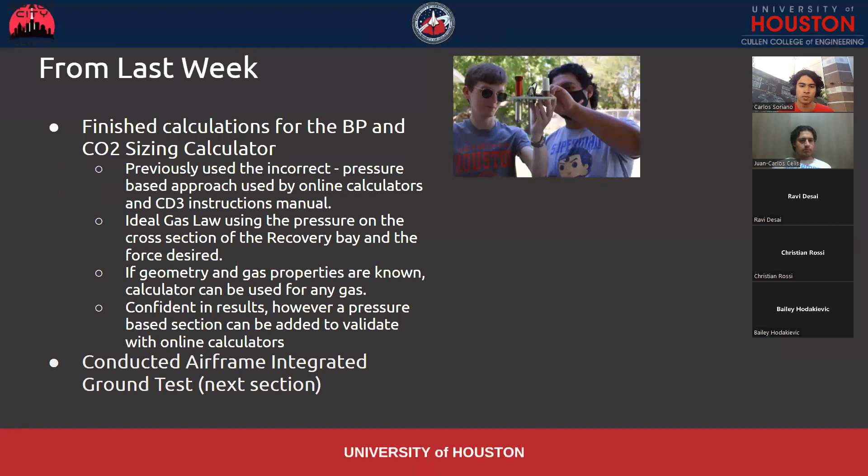So, well, there's supposed to be more pictures here. I guess it's loading. Let me know if the connection is decent, by the way. I am sitting outside of the Nook. So let me know if the Wi-Fi is not working, and I can maybe try to move inside and get a table in there.

Anyhow, so last week we finished the calculations part of the black powder and CO2 calculator. Previously we were using a pressure-based approach instead of a force-based approach. So whenever we tried using different parameters from the examples provided in the instructions, we were not able to get the same results. So we kind of worked our way with the ideal gas law and pretty much derived the way we need to do it for our approach. And that seems to be working. And the cool thing about this calculator is that if we know the geometry and the gas properties of the gas we're using,

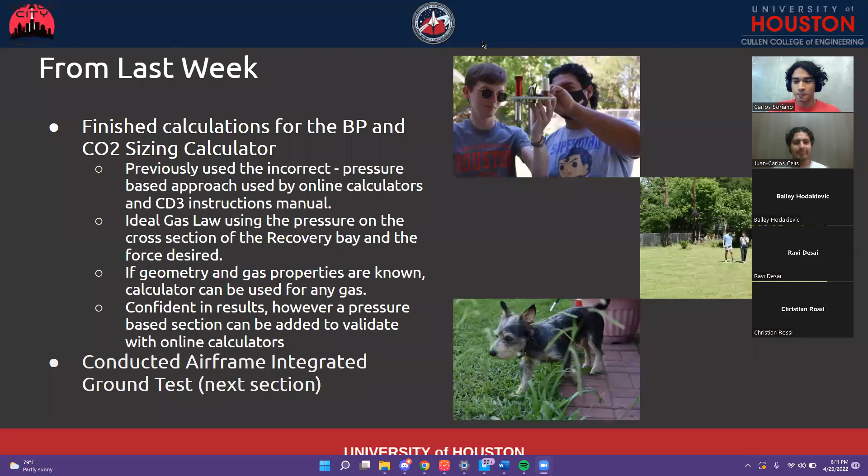Yes. You cut off. Okay, hold on. Let me just get another table then. Did it cut out for you guys again? It kicked me out of the meeting. Okay, let's try again, and hope it doesn't happen. If it does, I'm going to go inside of the Nook and see if I can find a table. Let's try again. Okay, what was the last thing y'all heard? All right, yeah. As soon as the slide loaded, that's when you cut off. Really? So y'all missed this whole slide? Damn. Most of it for me. Okay. All right, let me go see if I can find a table inside. I'm gonna pause the recording. All right. Okay, so I'll just restart.

We had some technical difficulties there, but from last week, we finished working on the calculations part of the calculator for the black powder and CO2 charges. Previously we were using a pressure-based approach for the actual equations, but we're trying to have a force-based calculator. So basically we worked our way back using the ideal gas law. What the calculator essentially does is take a force input and then calculate the pressure on the cross-sectional area that's perpendicular to the direction we want to apply the force. So in our case, since we want to eject in a direction perpendicular to the cross-section of the rocket, that's the area where the force is going to be applied.

So that's how we get our pressure value. From that, we use the material properties of the gas, and using the ideal gas law and the geometry of the rocket, we can calculate exactly how much black powder or CO2 we need to generate a specific force. This time I feel confident in the results that we got. However, since it's a force-based calculator, I couldn't find something similar online. So the way we can validate our results is by making a pressure-based calculator from the work we have so far. If it aligns with what the online calculators give us, then we know our results are good to go. The other thing we did on Wednesday was the ground test, which I'm going to discuss in the next section.

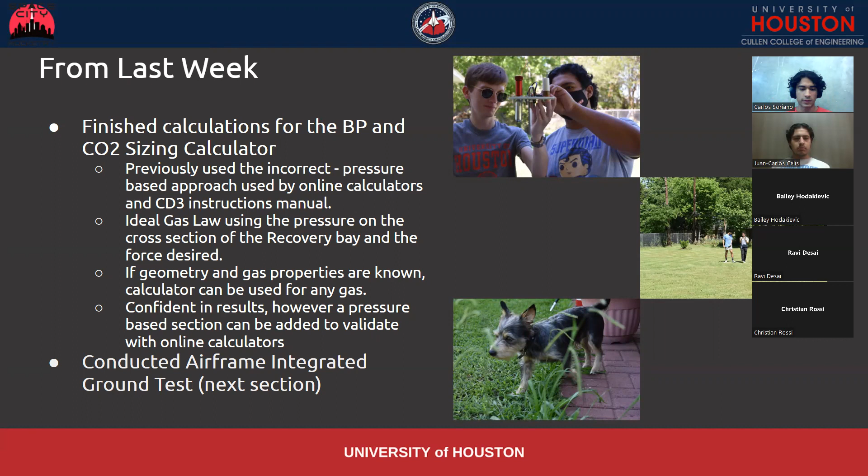Okay, so the ground test. The ground test was meant to test the CO2 and black powder charges, including the upper airframe, the nose cone, the avionics tray, and shear pins. We were using three 4-40 shear pins requiring 120 pounds of force to break. Last semester, when we were designing and making all of these decisions, we settled on a 1.5 times force multiplier to ensure that the shear pins would always break. So we aimed to produce 180 pounds of force. So after breaking the shear pins, theoretically there would be 60 pounds of force on the nose cone that would push it.

So the procedure and the methodology, you can find more information about it in the testing procedure document, which is the link right here. But essentially what we did is we assembled the CO2 system and the black powder system. Then we placed the assembled systems on the bulkhead. And then once avionics assembled the avionics tray, we put the bulkhead on, and we put the avionics tray inside the avionics bay with the assembled bulkhead.

And then we put the avionics bay inside of the airframe, which is this picture here. You can see there the avionics tray is inside of this bay here, and then we have the bulkhead there. And then once that was inside, we put the nose cone on and we put the shear pins in. And then the last part of the test was to trigger it remotely.

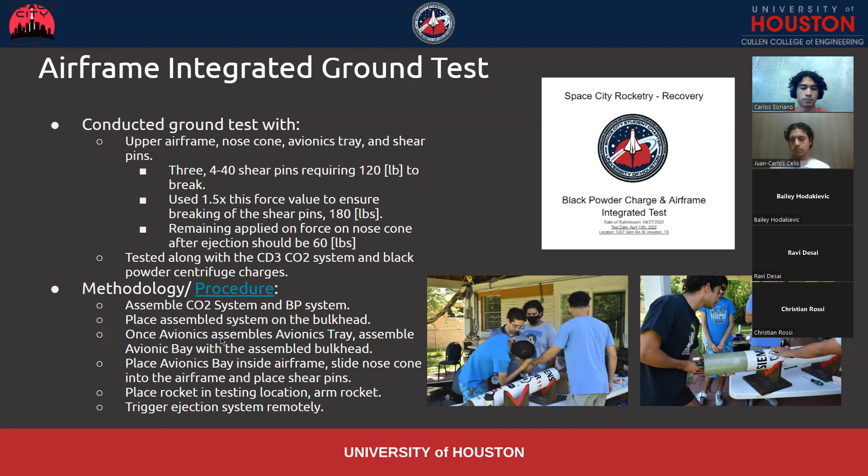So for the CO2, we used a 12-gram cartridge, and you can see the 2 different ways that we calculated which one to use. The first one was by using the instructions manual. So 6-inch airframe, and then if we were to make the volume of the nose cone or of the entire recovery bay into a cylinder, it would be, let's see right here, 19.17 inches. So that would put us between 12 grams to 16 grams. We decided to use 12 grams because half of this would be 20 and we're slightly under that. So we decided to use 12 grams.

And then the other way we decided that was by using our calculator. So we put the gas properties for CO2 here and then the force value we're trying to generate. And the result was 7.56 grams of CO2. So you go to the closest CO2 cartridge size to whatever value we get from this, which is 12 grams. So the assembly for the CO2 system was mostly unproblematic.

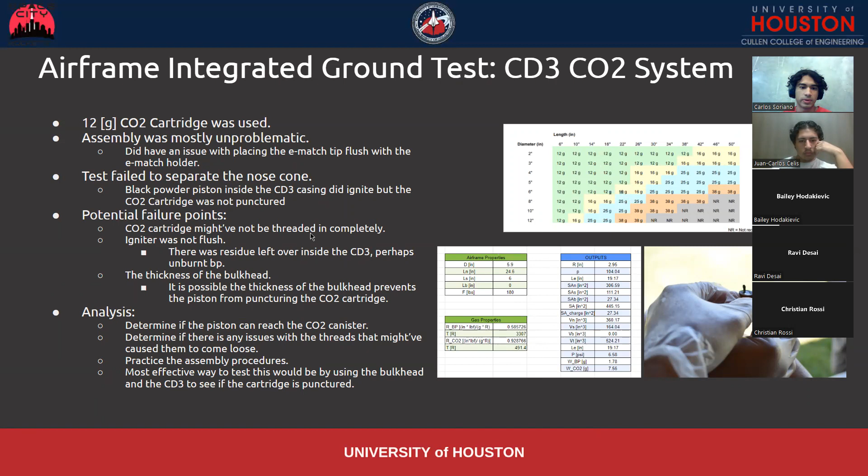The only issue that I think we did have that we need to work on is we were not able to get the E-match tip to be flush with the igniter holder here. As you can see here, it was sticking out a little bit. And then whenever we did have the test, the black powder piston inside the CD3 did go off, but the CO2 cartridge was never punctured. So the CO2 never came out and we weren't able to break the shear pins.

So the potential failure points for this: either we did not thread in the CO2 canister completely. Whenever we took it apart after it failed, I unthreaded the CD3 on the bulkhead a little bit, but not all the way. And then Gustavo, a few moments later, barely touched it and it just came off, which to me seems like we did not thread in the CO2 cartridge all the way.

It's also possible, since the igniter was not flush, maybe that led to failure. I know that when I took off the CD3 and I was trying to clean it up, there was a lot of residue inside, which maybe part of it was unburned black powder. So that could have been another possibility.

And then what I think is most likely is that the thickness of the bulkhead prevented the piston that punctures the CO2 cartridge from reaching it, because it hit the bulkhead and it wasn't able to reach the CO2 cartridge. So that's something that we'll probably have to test next week. And I hope that's the case, because last time we tested it during the ground test, everything was the same except for the fact that the E-match was not flush this time. But I don't see how that would lead to it failing.

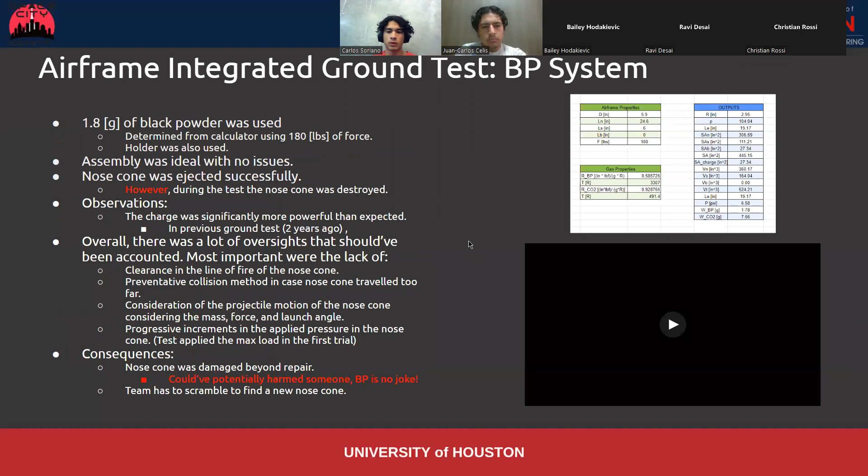And then for the black powder, this is where things kind of took a turn. So for the black powder system, we use 1.8 grams of black powder. Like I said, this was determined from the calculator. You see here 180 pounds of force using the gas properties for black powder and the volume of the recovery bay. We got a value of 1.78.

So the assembly for the black powder charges was ideal. There were no issues with it, especially since they were pre-assembled during the lab. All we had to do was connect them to the terminal. Some observations from the test. I will play the video in a bit, but the charge was significantly more powerful than expected.

I forgot to include a video of a ground test that we did 2 years ago, where it was the same basic layout. So we just attached the nose cone to the upper airframe and then attached the shear pins. And for that one, we used 1.6 grams of black powder. And it was not as powerful as the one we conducted. So I guess now it's the best time to play the video. So I'm just gonna mute myself and I'm gonna play it real quick.

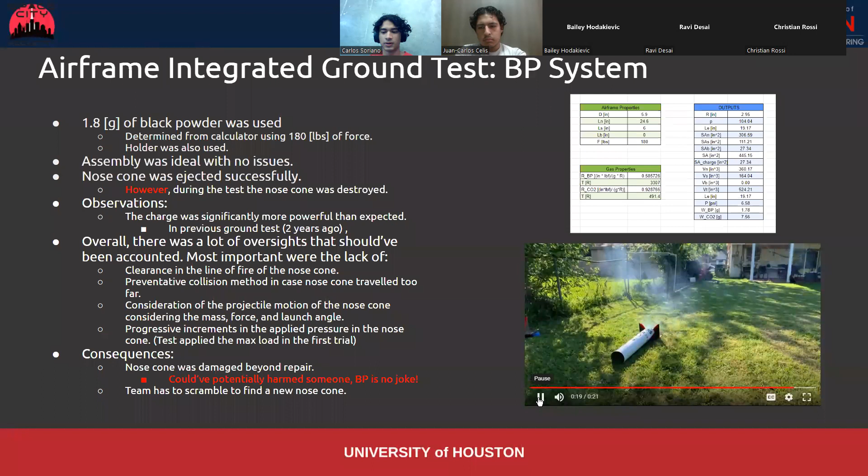So as you can tell from the video, not only was the explosion really loud, but it ended up traveling way further than what anybody was expecting. And then it hit the wall here of the house. And unfortunately, the nose cone kind of took it pretty hard and we destroyed the nose cone.

I think overall there were a lot of oversights that we should have accounted for, but the most important were the clearance and the line of fire of the nose cone. I don't know how we did not consider that we were aiming it right at the house. I think another one is that we should have had a preventative collision method in case the nose cone did travel too far. In this case, there was nothing to stop the nose cone if it went too far.

Another big one is the projectile motion of the nose cone, considering the mass, force, and the launch angle. That's a really simple thing to calculate, but we didn't. And another really important one is that instead of starting small and moving our way up to our force value, we went all in the first trial, which was not the brightest idea.

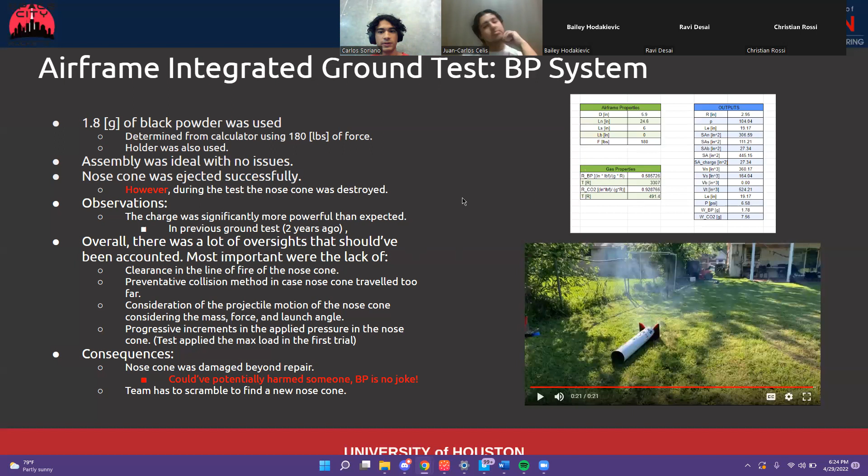So there are a lot of necessary changes that I think we need to make to the ground test. Number one is have a minimum clearance distance of 50 feet in the line of fire. I think any separation distance above 50 feet is unnecessary.

If we have a separation distance greater than 50 feet, then the shock cords are not going to be that long. So whenever the shock cords reach their full length, they're going to have to take all that force and absorb it because they have to decelerate the nose cone traveling really fast. So definitely a clearance of 50 feet, I think, is an excellent idea.

The next one is having some sort of collision prevention method after the 50 feet. So this could be something like a soccer net or a blanket to catch the nose cone if it goes further than that distance. Another one is to have a sufficiently long cord to prevent any component traveling too far.

Another one should be that we should probably cap the maximum amount of force at 1.5 times the separation force. I think anything more than that is unnecessary and a safety concern just by looking at the video.

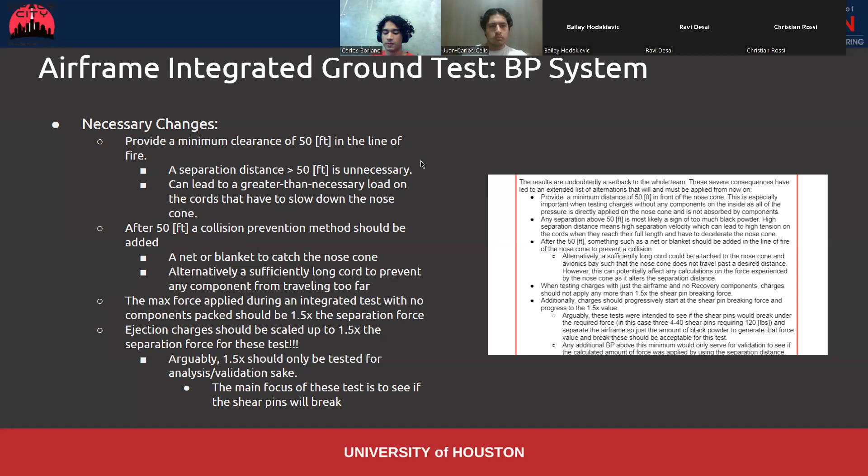So yes, I think getting an estimation of where the nose cone or whatever component is going to land, by doing the projectile motion calculations, is something that we should do from now on. And this is something that we can easily add to our calculator.

So if we know the mass of the nose cone, the launch angle, and the theoretical force that should be on the nose cone once the shear pins are broken, we can get an estimate of how far the nose cone can go. And if it's over 50 feet, then we probably want to decrease our amount of black powder or CO2.

I think another thing to consider is that since all the pressure goes on the nose cone, especially for these where we don't have any recovery component, we should probably minimize our launch angle. Like I said, for these tests, we're interested in knowing if the shear pins break. So we're not really that interested in our separation velocity and distance. So it's okay if a lot of the energy of the nose cone is absorbed by the ground due to a really low launch angle.

I think that's okay because those 180 pounds of force, I think all of us didn't expect them to launch the rocket so fast. And we really overlooked the fact that we were aiming the rocket at a really high angle. I think it was probably really close to 45 degrees, which is why it traveled so high and so far.

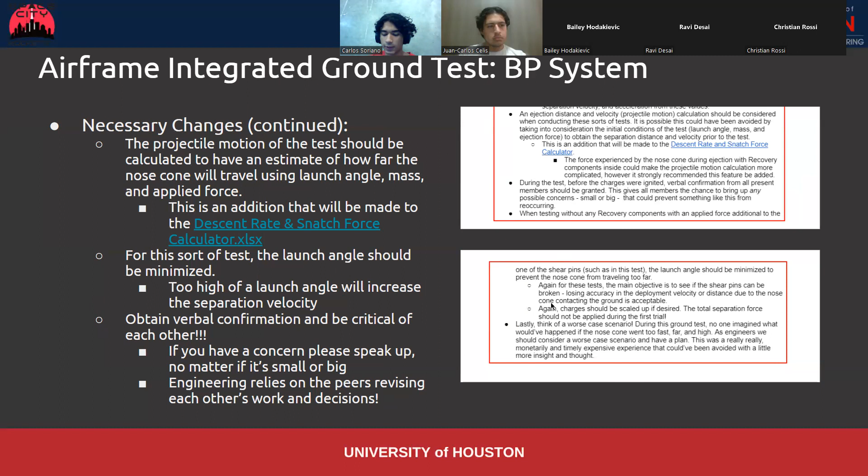Engineering relies on peers revising each other's work and decisions. That's engineering basically. So please, if you have any concerns during a ground test, please let us know. And then the figures here are a more detailed version of the bullet points that can be found in the procedures document in the results section. So I strongly recommend that all of you take a look at it and give it a read.

There were also some less critical issues and improvements to be made. One of them was that the U-bolt threads were too long, and this caused the avionics tray to hit it. There is a simple solution to this. We can either add a nut on top of the U-bolt and keep the ones underneath to move the threads up a little bit, or alternatively, we could cut more threads off, but that took a little more work. So if the nut method works, I think we should just do that.

We also have to make sure that whenever we connect the wires to the terminal block, we connect it to the right one. I don't think it was our mistake, but definitely something that we have to be aware of, because we were not able to test it the first time because we attached it to the wrong screws.

Another thing I want to mention is whenever we attach the wires to the terminal block, we want to make sure that we twist the ends of the wire clockwise on the top of the screw and move our way down. So as the screw is turned and screwed into the terminal, it pretty much sandwiches the wire in between threads.